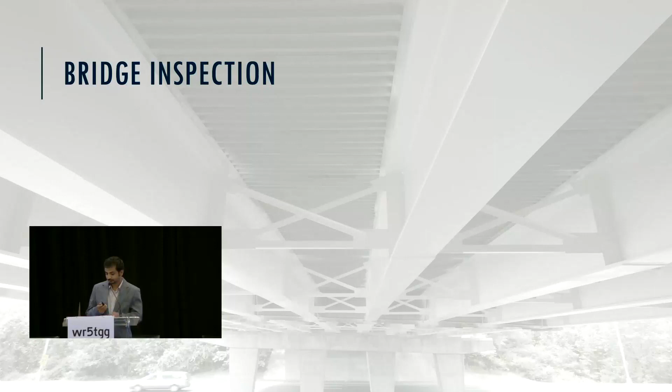So this presentation explores the transformative potential of drone technology in revolutionizing the bridge inspection process across the USA. So bridge inspection plays a pivotal role in ensuring safety, longevity, and operational efficiency of critical transportation infrastructure in the United States. Bridge inspections are a critical part of preserving our nation's bridges to identify current conditions, needed improvements, and provide recommendations. Any bridge recommendations will be provided by the inspector so that the bridge can be repaired. The duration timeline of the repair recommendation will be categorized based on the criticality and extent of the defects.

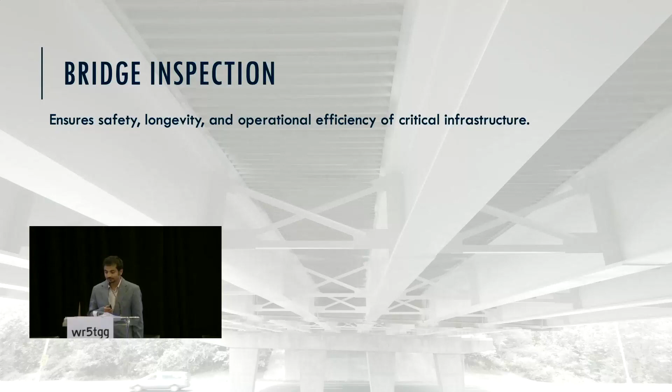As per the National Bridge Inspection Standards, all bridges in the USA are routinely inspected every 24 months at least, and NBIS regulations apply to all bridges greater than or equal to 20 feet. So upon notification with FHWA, under some conditions as set forth by NBIS, such as deck, superstructure, substructure, culvert conditions greater than or equal to 6, inspection intervals greater than 24 months but less than 48 months are allowed in some special conditions. There may be interim inspections required, and that makes inspection frequency 12 months, 6 months, and even monthly.

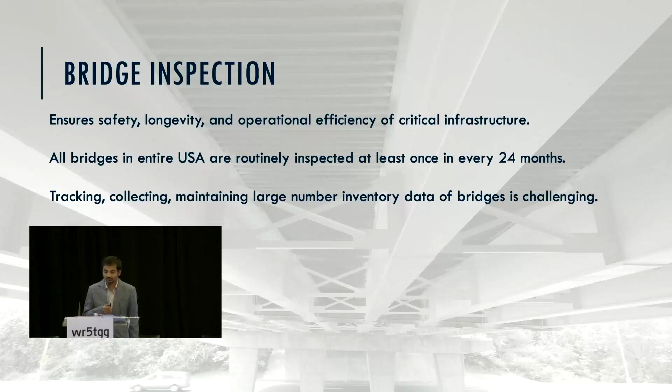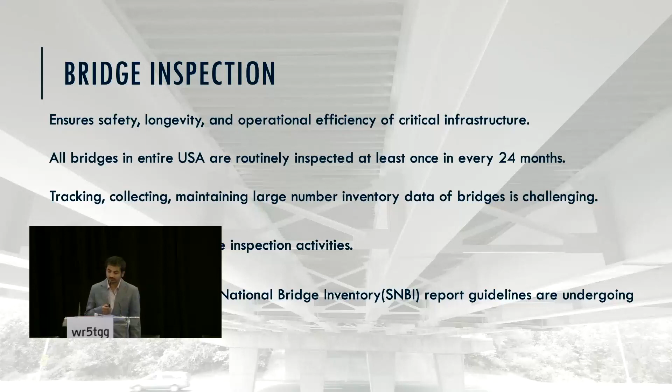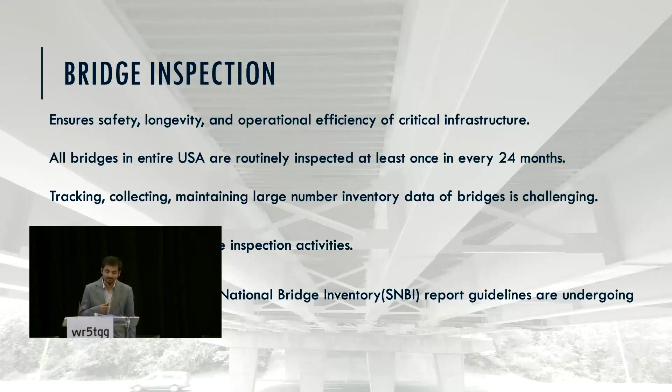So new Specifications for the National Bridge Inventory, SNBI, were recently published, and they're going into effect soon. So thank you FHWA for recognizing unmanned aerial vehicles as inspection equipment in SNBI. So now it's time for drones for asset inspection. So a drone, as you know, is an unmanned aerial vehicle used to capture different types of imagery, such as images, videos, thermal images, and now 3D data as well.

It is used in multiple sectors, such as inspection, construction, agriculture, rescue operations, surveying, delivery, wildfire tracking, and much more. So for bridges, culverts, high mast light poles, sign structures, drones can provide more visual coverage of assets, for there are many components which are difficult for inspectors to reach, and drones can capture the required data in no time. In fact, more data will be captured. Drones can maneuver in almost all locations with minimal cases of missing defects, since we can still go through the footage back in the office. With drones, I feel it's a new era of bridge inspection.

So I feel drones are really bringing bridges back to our office desks to make informed decisions with all that data, 3D capture, and now with head-mounted displays, AI, and defect quantification technology. It's really a different ballgame.

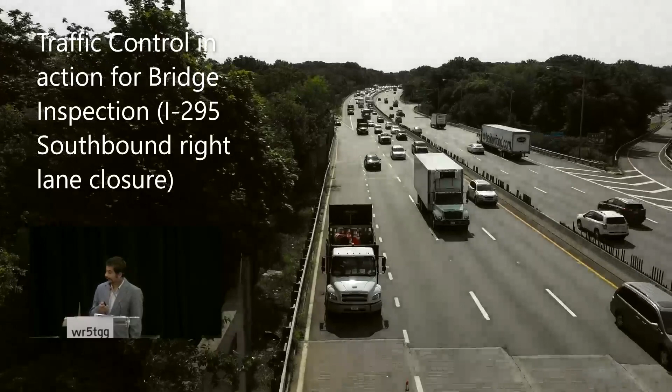So let me show you a typical setup that we do for traditional bridge inspection. This is footage of traffic control in action on Interstate Highway I-295 in New Jersey. We are using 3 heavy crash truck attenuators for bridge inspection to protect our bridge inspectors. So let me play this video. So there are vehicles coming from the ramp lane to merge onto the Interstate Highway.

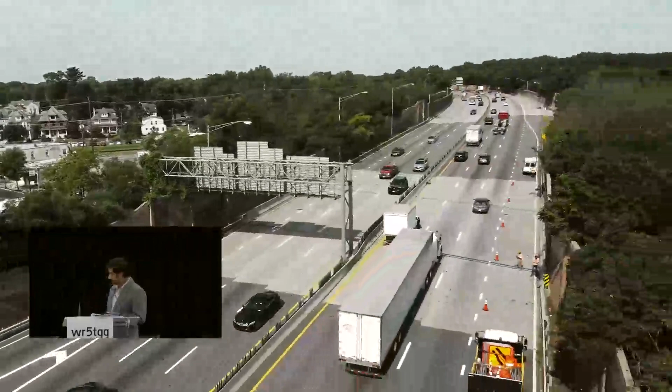So there will be issues for the merging driver, as there are stationary crash trucks parked right there, and they are left with a very short merge with an increased blind spot, and it's a 65-mile posted limit, and traffic density was increased as well. Sorry, the video got forwarded.

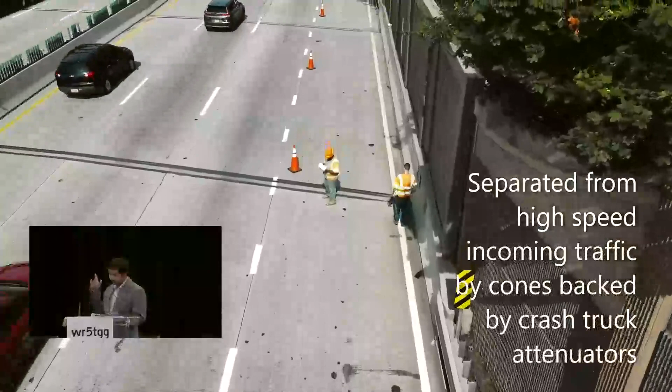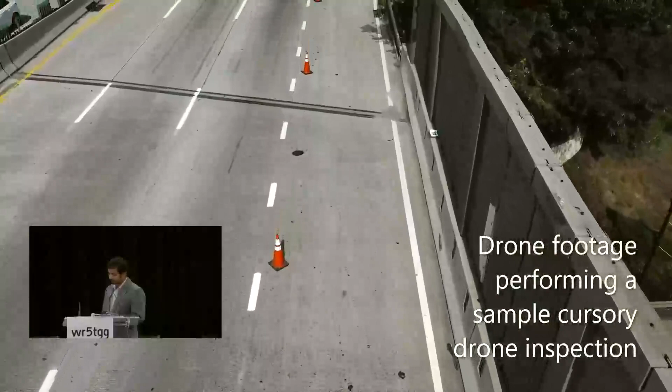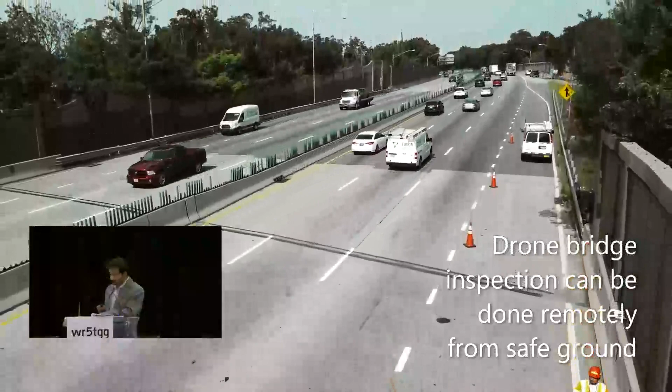So on the other end, here are our bridge inspectors performing bridge inspection at I-295. We are doing deck inspection here. We are separated from high-speed incoming traffic with 28-inch cones and backed by crash truck attenuators. Bridge inspection workers are vulnerable to being struck by high-speed moving vehicles, and they are just separated from incoming traffic with the cones. So here's a sample drone footage performing cursory inspection.

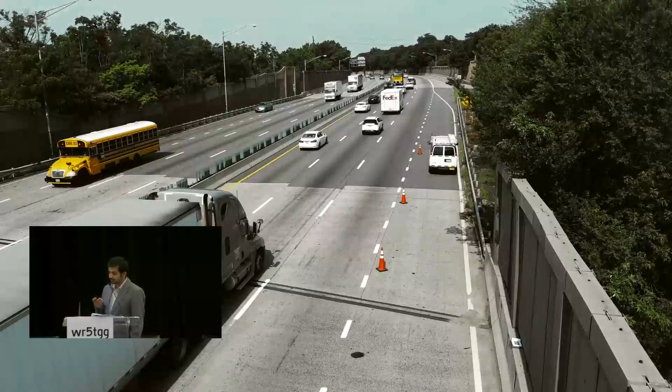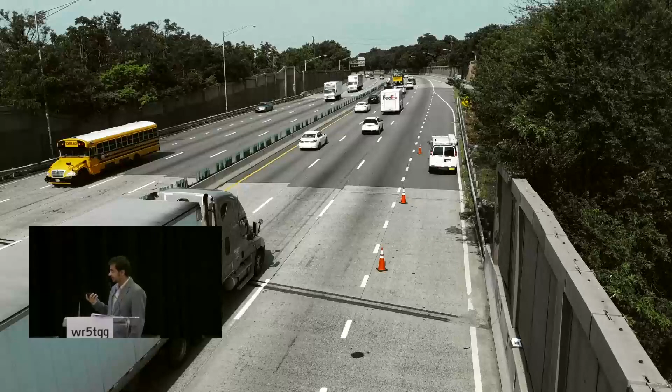I think it was greater than or equal to 7 as per NBIS, which means there are typically no defects. Also, bridge inspectors can hardly see what's going on in the left lane. They can just see the lane that's closed and beside that. And we have to close the other side as well. Though it didn't have many defects, that's a typical setup for the procedure, and that's how we do it.

And this is another video for Washington Crossing Bridge. This bridge is located at the border of Pennsylvania and New Jersey, built symbolizing where our first president, George Washington, crossed the Delaware River to New Jersey in 1776. Using drones, we can reach the top chords of this truss bridge easily in no time and reach physically challenging areas easily to capture the full bridge.

Just to see the rust in the top chords right here, either you may need to go with labor-intensive, risky ropes or use road closures with heavy equipment, which will impact roadway traffic, as it is very narrow lanes, narrow 2 lanes here. And now with drones' accuracy, I feel it's time to revolutionize our bridge inspection procedures.

So instead of affecting traffic, putting inspectors at risk, and using costly heavy equipment, we could have inspected this kind of bridge with drones from safe ground, with minimum closures for reducing public impact, simplification of inspection with time savings, reducing use of costly heavy equipment, and enhancing the data quality that we collect.

So in-house drone capabilities can allow for rapid bridge emergency response as well, whereas right now we are bogged down waiting for deployment of specialized vehicles, like in cases with girder hits. There are lots of cases of girder hits by trucks with low underclearance.

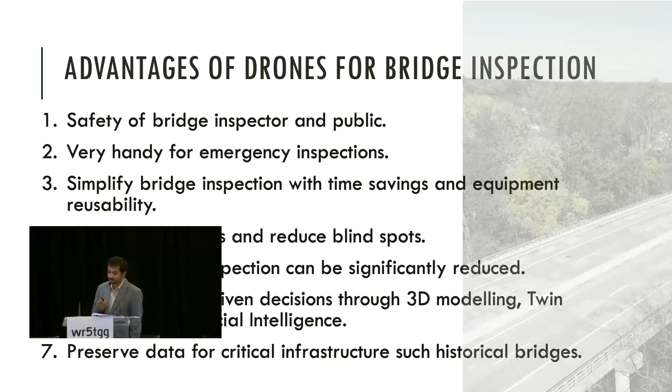So let me summarize the advantages again over here. Drones can enhance safety by reducing exposure of human inspectors and the public to vulnerable environments. We can reduce public traffic impact by reducing the number of lane and shoulder closures, like I showed you in the video before, and it'll be safe for inspectors since they will be on safe ground.

So let me show you one picture. This is a picture from Rhode Island. There are two inspectors inspecting the bridge. Some may be familiar with this picture as well. The UB60 got tilted while they were inspecting the bridge. So another UB60 had to be brought in so that the inspectors could be rescued.

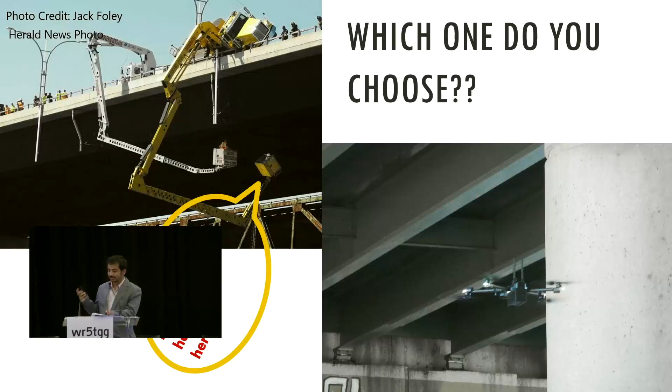And getting a UB60 is very tough with scheduling because we have so few UB60s right here. So if we could use drones and identify the critical areas, I think we could minimize the use of UB60s. And these are some risks associated with bridge inspection. These are the published articles.

The first incident is an inspector that fell 140 feet to his death, striking the railroad underneath during inspection. Another case was a drowning in New Jersey at the Passaic River. There's another reported death where an individual contracted by PennDOT was controlling a bucket truck himself, but got too close to the beam and got crushed while operating the bucket truck.

And we recently had one incident in-house as well. We had to inspect a bridge with a UB60 over a river, so we needed to put a boat underneath for safety as well.

One of our colleagues at NJDOT mistakenly hit reverse instead of forward at the boat ramp with a large motorboat in it. So one of our vehicles drowned with the boat and the inspector in it as well. Thankfully our inspector was safe because there were some kayakers over there, and they rescued her. She had just delivered a kid and was going through the recovery process. It would have been very bad if something had happened to her.

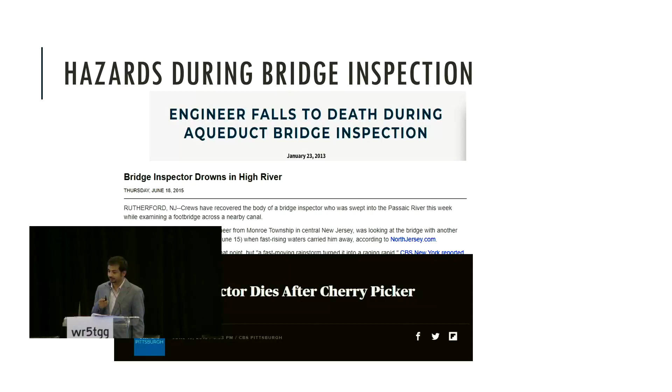Now she left our unit; she's in pavement design. The vehicle and the boat couldn't even be found for like 3 days. It went so deep downstream. So you all may have similar incidents in inspection as well. So I believe we should put machines instead of humans at risk, especially for the bridges with UB60 that take lots of our resources. So going back to my advantages slides.

So number 2, drones for emergencies can be deployed as our first responder to the site, since often our time goes to scheduling heavy equipment and doing road closures. And for simplification and time savings, traditionally we use snooper trucks, bucket trucks, ropes, boats, coordination with third parties, and scheduling them is tough. Depending upon bridge type, drones require fewer resources and enable swift data collection and analysis. They're fly ready within a minute or two. Even with a ladder, it takes like 10 minutes just to take it out, put it back in, erect it, go up, and stuff like that.

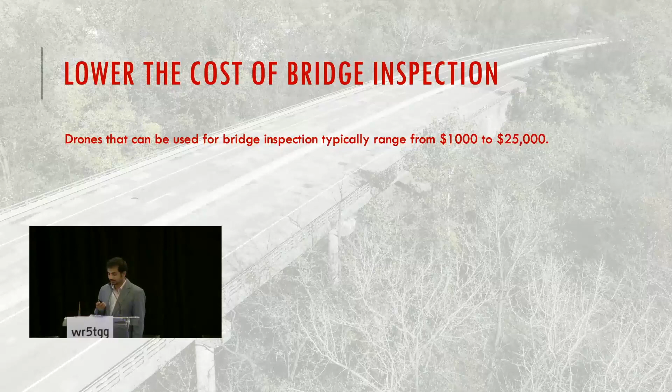We are paying 7,750 to rent a UB60 for a single day. Utilizing drones, we can minimize the use of the UB60, since it involves risks, multiple lane closures, and public impact, and reduce the cost and time of inspections. I have recorded data that shows that just for the UB60 to go down and come up, it takes more than 20 minutes without doing any inspections.

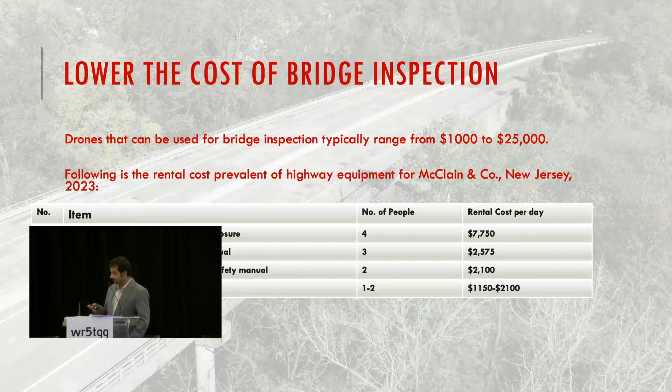As per Minnesota DOT, I think it published a report in 2018, Improving the Quality of Bridge Inspections Using Unmanned Aircraft Systems, done by Barritt Lovelace. So this is some cost-based research finding by Minnesota DOT. Research on a wide range of bridges, including complex fracture-critical bridges, bridges over waterways, roadways, railroads, swamps, and regular NBIS bridges, came to conclusions with savings ranging from -72 to +79%, with an overall cost saving of 40%.

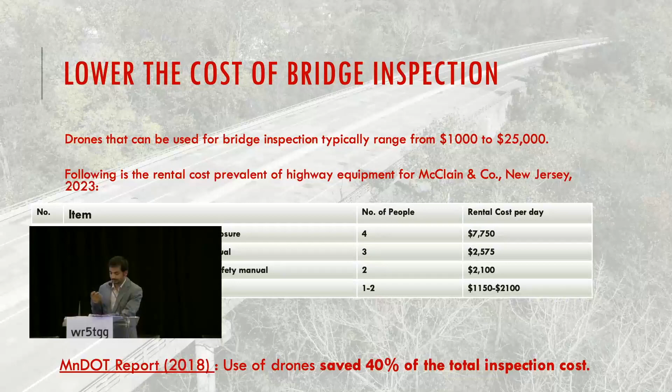So -72 is where sometimes it's better to just go in person without using drones, wherever heavy equipment is not necessary, due to operator and post-processing costs, and +79 is for not using a snooper truck, bucket truck, and lane closures. Sorry to go back and forth, I think I missed some. Yes, so I'm on bullet number 6.

So with new technology in place, we can literally bring bridges to the office, meaning with 3D data, we can access all the bridges sitting in the office. Now we can incorporate our field notes in the model itself; just imagine how much easier it'll be for another person going through our bridge inspection report to see our inspection findings. The data collected by drones can be processed using computer vision algorithms, artificial intelligence, and machine learning techniques, enabling automatic detection and analysis as well.

It can improve the accuracy and reliability of inspections, leading to informed decision making regarding maintenance and budget allocation as well. The combination of aerial imagery and advanced analytics really eases the inspection process, reduces human error, and provides valuable insights for maintenance and rehabilitation strategies. Drones can facilitate the creation of comprehensive 3D models, point clouds, and orthomosaic maps, which can aid engineers, policymakers, and stakeholders in visualizing the bridge condition and prioritizing necessary bridge repairs for operations as well.

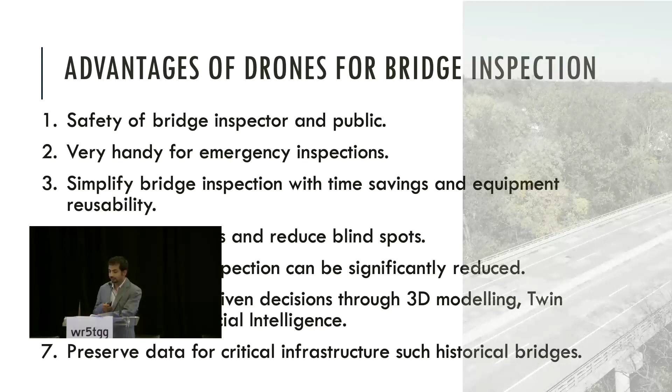Nowadays, we have autonomous drones, data processing companies, and AI in place, which can really give precision. So we can create twin models as well, so that a similar bridge can be reconstructed again. We can preserve that data for critical infrastructure, such as historical bridges. So although bridge repairs cannot be done without reaching the defects, I think inspection may be performed with drones wherever hands-on inspection is not required.

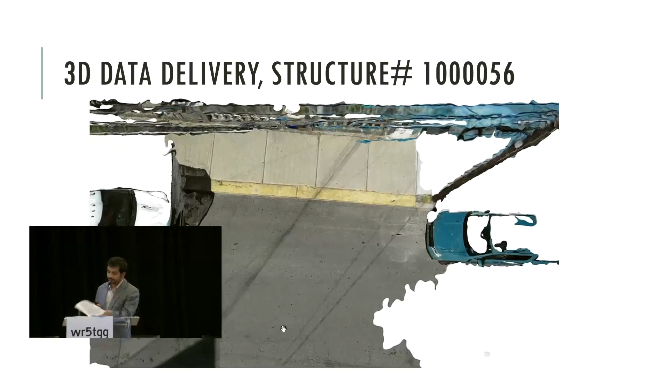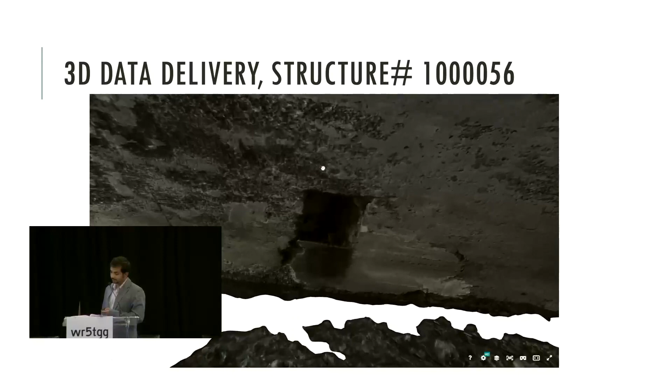So I think I've gone through all these slides. So this is 3D data capture that we did for 3 bridges. We recently did it; it was submitted like one month ago. We allocated some hours for inspecting using drones. We gave 5 NBIS bridges to AI engineers, our in-house bridge inspection consultant. So these are small bridges. We did this to get an idea and showcase what can be done with a 3D model. Since I cannot scroll myself, I just recorded a screen capture here, so it may not be that good.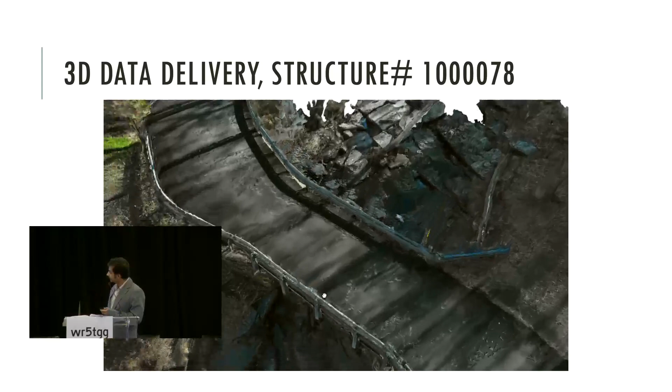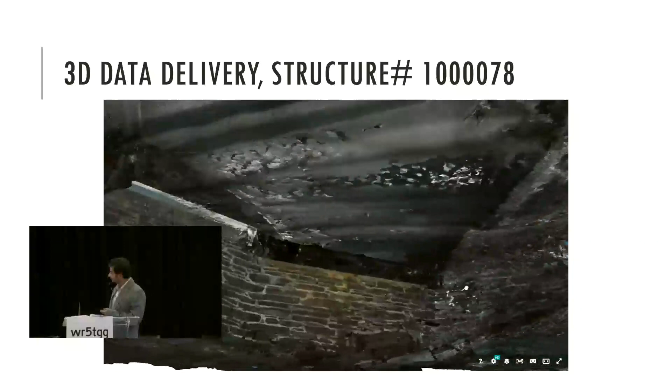And this is another bridge. It's structure 1000078 in Hunterdon County. This is a county bridge as well, NBIS bridges, small one. So we did some 3D data delivery for this one and this one as well. It's an arch bridge. So these were recently done by one of our consultant AI engineers.

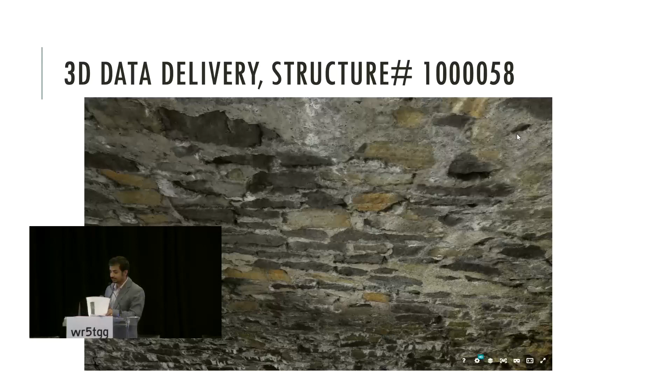And seeing these details, I think it's time to deliver data in 3D functionality rather than our bridge inspection reports with photos and words. So every aspect has some limitations somewhere. So these are some of the limitations that I've been facing.

So in most of my services, people are kind of reluctant to use drones. Most of my seniors have always been inspecting from the ground for 52 years, after publication of NBIS in 1971. It could really be easier if FHWA could provide concrete guidance to state DOTs, such as a manual or NHI training course for bridge inspectors. I feel we are missing the regulatory frameworks for integrating drones at the state level.

But recently, FHWA announced that there are some NHI courses coming, so I'm really excited for that course to come up, so that we can start something at the state level as well. I'm also a course introducer for one of the AASHTO courses, application of UAS for in-service bridge inspection, and I'm working as a technical panelist. This course is under development, and like I said, the federal level course will emphasize real use case scenarios for bridge inspections.

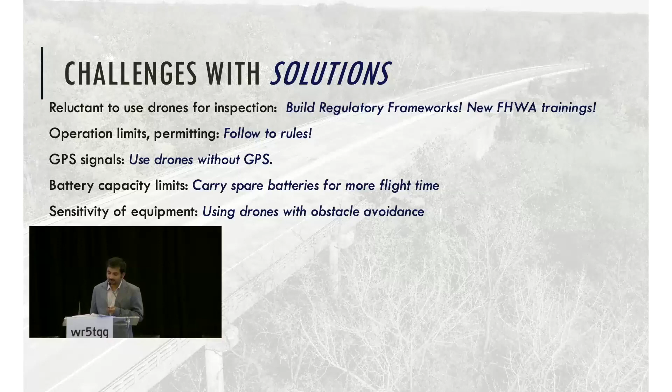And drones, like any other vehicles, are very susceptible to collision. Nowadays, drones have a great feature that is obstacle avoidance. So I feel like we are overcoming that challenge by using drones with obstacle avoidance.

So with drones, we have lots of data. So post-processing may be required, and proper space allocation needs to be done. So we may need to allocate extra cloud or hard drive to store data, but they can be cheap compared to heavy equipment and intensive manpower that we use.

So clear and sunny weather always gives the best footage. Most drones are not waterproof. They cannot be operated in rain and snow, high winds, and sometimes even in high humidity. Commercial drones can be flown in wind between 10 to 30 miles per hour. Lower the wind, better the result, since the drone will be stable.

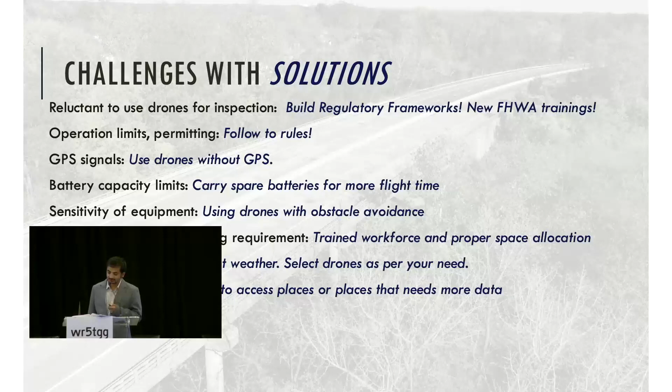Drones with flashlights are preferred for bridge inspection. For some components, additional lights need to be attached. So drones, it's not hands-on. So drones cannot fully replace hands-on inspection, but give a great opportunity to see areas that are traditionally harder to access with snoopers, and we can get a good idea of what condition it is in and where we need to focus our efforts. So a well-trained operator can operate drones safely and overcome the listed limitations.

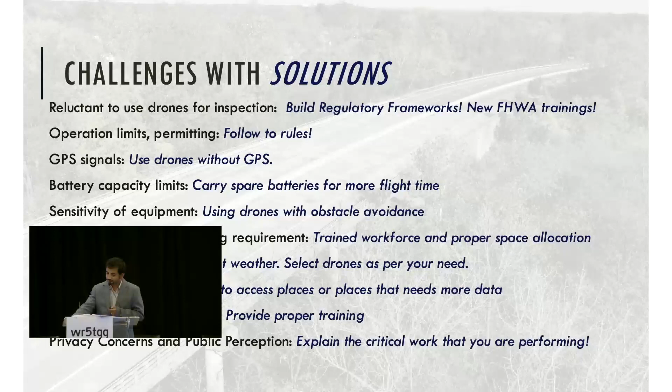Using drones could be challenging, as is the case with new technology that has eventually simplified our daily work functions, such as computers and mobile devices. Training, we need to provide proper training. NJDOT has a mandate that even though we have FAA Part 107, we still need to go through our NJDOT competency check, flight operation check, and we have specific procedures to do that. So until we get that lined up, we can't fly commercially for New Jersey.

So there are some privacy concerns and public perceptions, and that needs careful consideration to address potential issues and build public trust. So we can explain the critical work that we are doing preserving our national infrastructure. We need to try to keep off limits with private property and not be intrusive. So we need to get permission right away if we are using private properties. Sorry. So we may use distractions such as flashing lights of our vehicles as well to distract the general public when we are operating drones near a roadway.

So it's always a learning curve. The more we do it, the more we learn. So I want to reiterate our Assistant Commissioner, Mr. Portoza's comments when I did the proof of concept for NJDOT: Just do it. You won't know until we do it. So it really encouraged my efforts. That's why I'm trying to explore more and work more on this topic. And we are learning new operation techniques day by day.

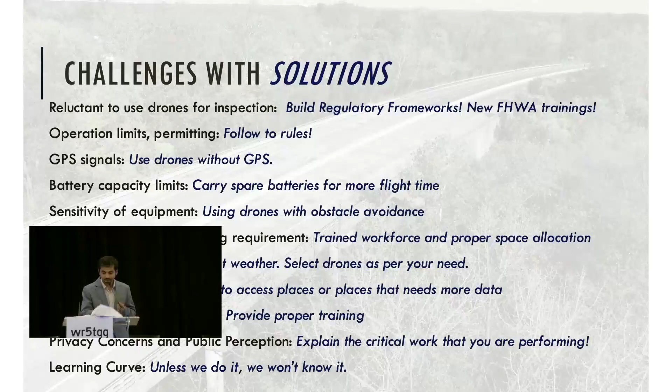So we are just beginning in this phase of the program. Tons of things to do. Tiny rudder in a huge ship. It will take time, but as a certified bridge inspector and senior engineer at the New Jersey Department of Transportation, I feel that use of drones for bridge inspection is inevitable, and it'll come for sure. So as this technology continues to evolve, bridge inspections in the USA will benefit from increased automation, improved data analytics, and enhanced decision support systems.

Integration of drones presents an unprecedented opportunity to transform the way bridges are inspected, ensuring the resilience and longevity of critical transportation infrastructure. I'm Utsab Pokhrel again, Senior Engineer, Structural Evaluation.